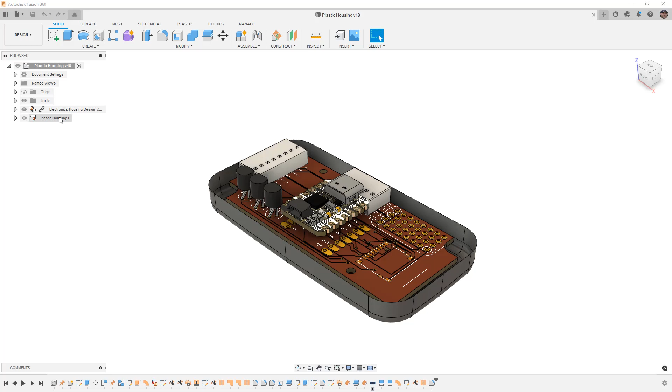But at the end of the last video, I left you with a question. I wanted to know what the difference was between using thicken on a drafted part versus creating a patch and using solid features such as the shell command.

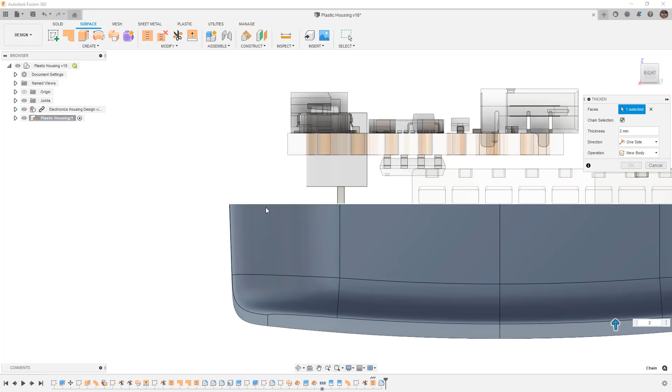The thing we need to think about when dealing with these parts is that the draft angle is going to affect everything. So when we use something like thicken, that creates a thickened surface in the normal direction to the curvature. This means that the upper face is no longer flat, it's going to be at 2 degrees. So these are the kinds of things we need to consider when turning surfaces into solid bodies, especially when accounting for draft.

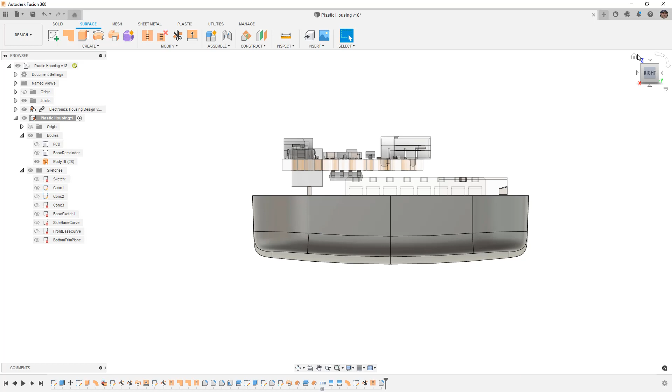For this example, I have to say, full disclosure, this is the third time filming this video. I want to avoid getting too deep into surfacing topics because that's not the point of this series. But as I kept recording and building out the top of the housing, the design got more complex and there were more issues with the surfacing tools in Fusion. So what I want to do is simplify it a little bit. We're going to do a hybrid approach, using some surface techniques, then adding more details once we get to the solid techniques. So the next step is to begin building the upper section of the housing.

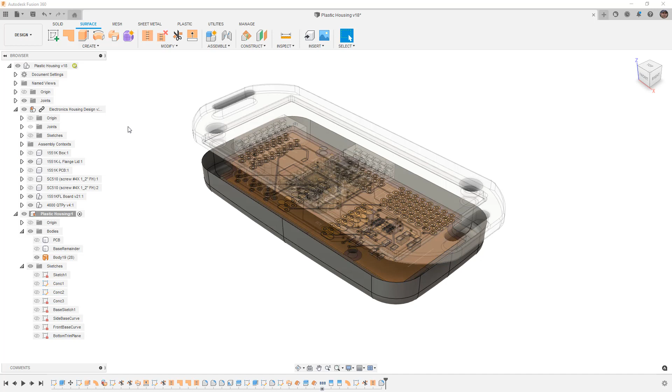Remember, the original design has little tabs or ears on the side, used to be held down to something using zip ties. I'm going to follow that same process. I want to use some way to hold this down with zip ties because it's intended to be on a motorcycle, and I'm not really going to bolt it down anywhere.

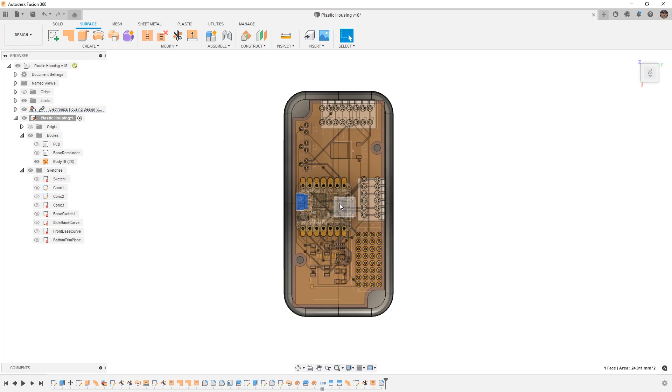However, when we look at this design from the top, we've got wires coming in from this side, potentially wires coming in here. We've got a USB-C and this Qwiic connector, and we have this reset. We might want to incorporate a small hole so we can stick a screwdriver down there. So when we consider all of that, we can't run a zip tie from the upper portion to the bottom portion lengthwise because it'll get in the way of the wires. We can't run it from left to right directly in the middle because then we cover up the Qwiic connector, the USB-C, and potentially the wires coming in here.

So the only options we really have are to split the difference. We're going to go from left to right, on either side of the microcontroller. This helps us because we're working with symmetry. We started this process by making sure we were in the center of our coordinate system, so it makes it a little easier for us. We also broke up the bottom face into quadrants, so really we can focus on just modeling a corner.

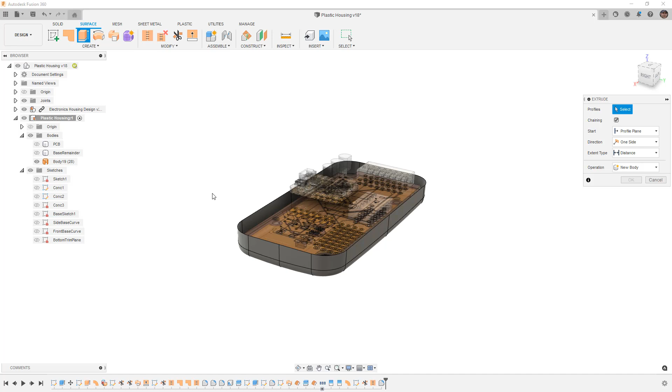So the next step for me is going to be to use Extrude. I'm going to select this entire rim, go to a right or back view, and bring this up. I want it to come up far enough that it goes completely over anything I want to encompass. So 9 millimeters looks like enough. I want to go a bit further because I'm going to add extra and trim it away.

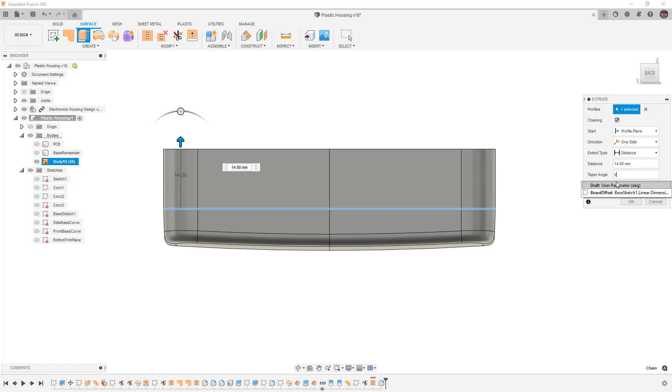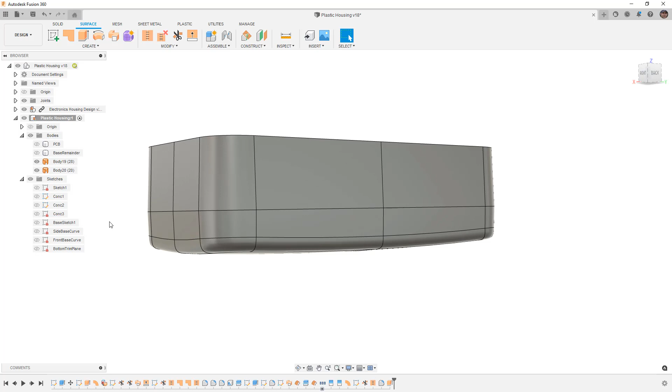Then we need to account for draft. If we simply enter D and use our draft parameter, notice that it drafts it outward. This is generally something we want to avoid because it will get stuck in a mold. We've already talked about the reasons why we need draft, so in this case we have to use a minus sign before to ensure it drafts in the opposite direction. This is a new body, so we're going to say OK. And now we've got the upper section here. I can hide the bottom, I don't really need to see it.

Just like we did on the bottom, we're going to create some arcs and create a swept surface. I'm going to start a new sketch, select my XZ plane, use slice, and then go to create, project include, and intersect.

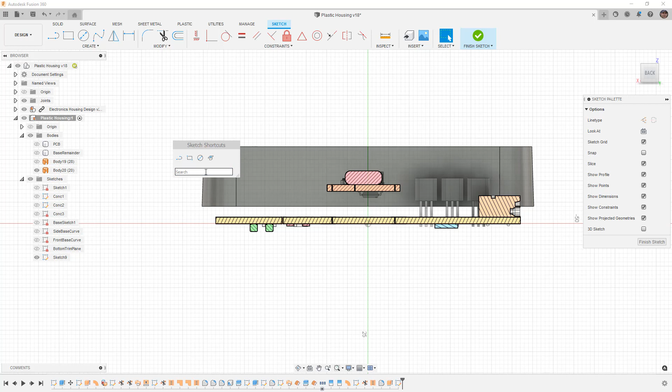If you're using these tools all the time, you can pin them to your toolbar, your shortcuts, or even create a keyboard shortcut. If you pin to the shortcuts and hit S on the keyboard, this brings up your sketch shortcuts. This is contextual, so if you're working in the design workspace on solids, not in a sketch, you'll see a different list of tools. Here we could either search for intersect by simply hitting I, and you'll get everything that starts with an I, or you can add it here so it's a little easier to get to.

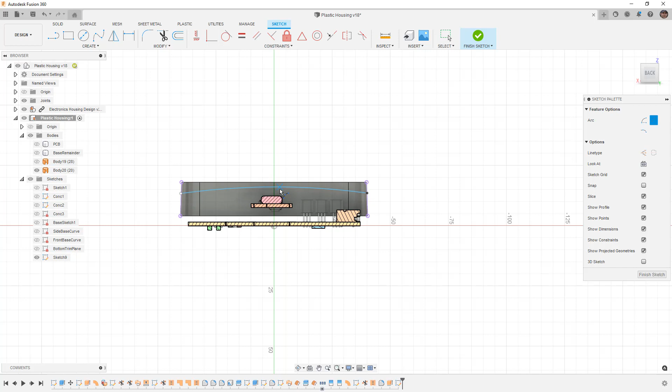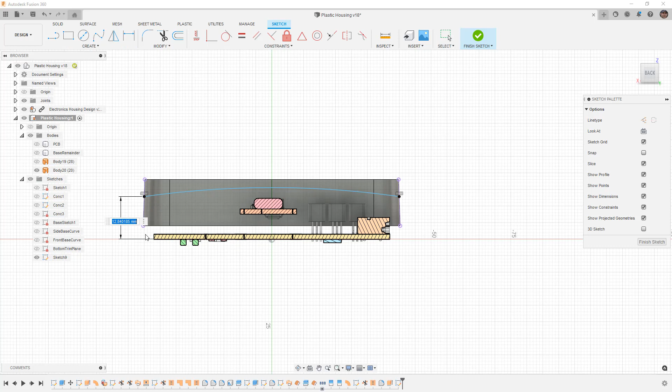I'm going to select those two on the side, say OK, and create an arc. Create, arc, 3-point arc, going from left to right to create an arc here. I'll use horizontal to create a horizontal constraint between these two sides. We want to make sure this is coincident with our intersection, then bring it down to a rough location where we think it makes sense. D on the keyboard or sketch dimension, we'll pick a position - in this case, looks like 12 millimeters, possibly 13 millimeters will be okay.

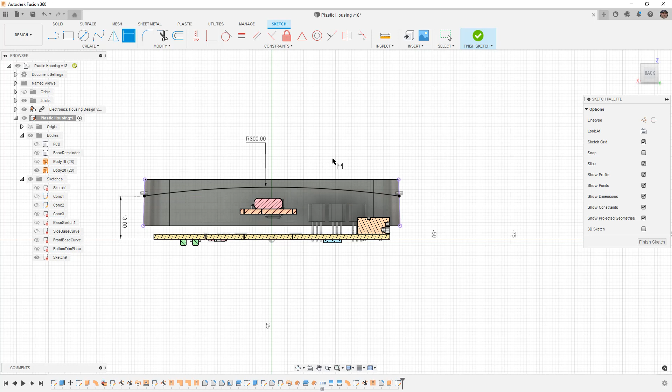Just in the interest of fully defining everything, I'm going to give this a 300 millimeter radius. Remember the one on the bottom was like 650, which means it's less of a curve - it's got a larger radius value, which means it's closer to flat. So we're going to have a little bit more curvature on the top, and that's okay. It's going to change the way this design looks.

We're going to repeat the process. This time we're going to use the YZ plane. Once again I like to slice, and we'll use intersect - I have it on my shortcuts now, so I can hit S, or you can go up to create, project, include, and intersect. We're going to make sure that we intersect with our arc as well as both sides here. I'm going to hit enter to OK that.

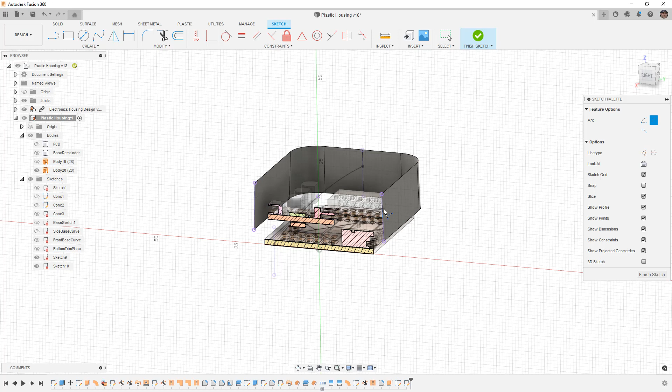Next, I'm going to create a 3-point arc. Once again we're going to go from the left to the right, making sure we snap, and then snap to this point here. You'll notice that this vertex is white, and that's because it didn't actually make a coincident constraint. So let's make sure we do add that, and then make sure these two are horizontal - it shouldn't over-define it, but just in case, we want to make sure they're horizontal.

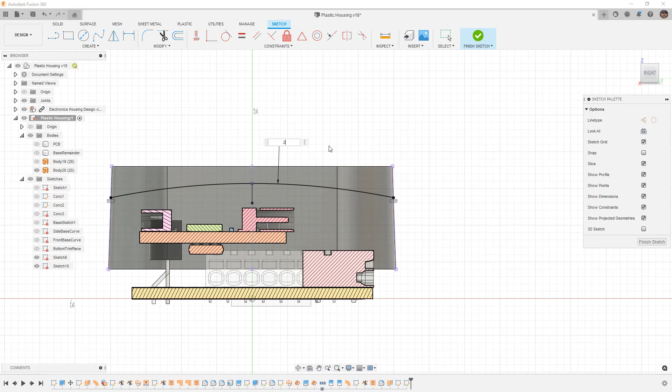Then I need to either give it a height from the origin or some other reference, or I can give it a radius value. So D on the keyboard, radius value - I'm going to say 200, a little bit less of an arc than it was coming in at, but you can see it's different than the one we've got going across the major surface. So we're going to say OK.

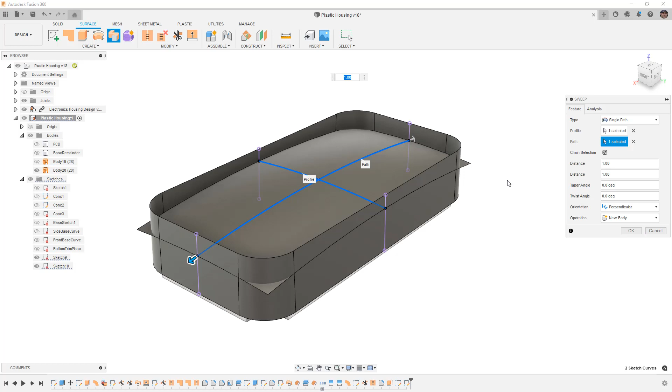Then we're going to use sweep, pick one of these as our sweep profile. We're using a single path, and we're going to create that surface. Note that we could extend this out - we could have created these curves to go a bit farther, but in the interest of symmetry, using those intersections really helps us. So now we have two surfaces here.

In an ideal world, we should be able to stitch them together and just fillet the corner. It's the same thing we did on the bottom, but sometimes it's not going to work. So let's try that method first, and if it doesn't work, then we'll come back and use some surfacing techniques. So again, I'm going to trim.

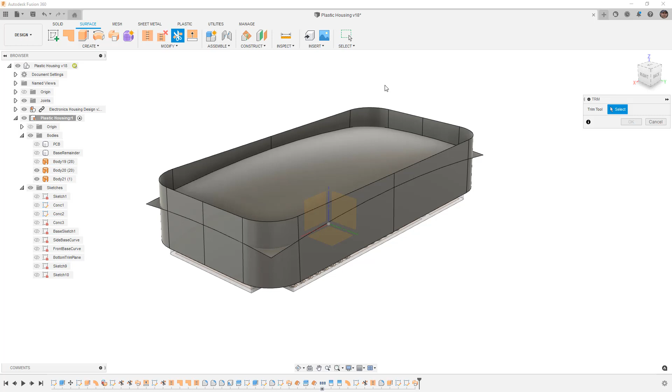I'm going to use this as my trim tool, get rid of this upper section here, right click and repeat that. This is my trim tool, and then I need to get rid of each of these little corners. You probably want to rotate this around because it does tend to have trouble when your selection is obscured by your trim tool. We're going to say OK.

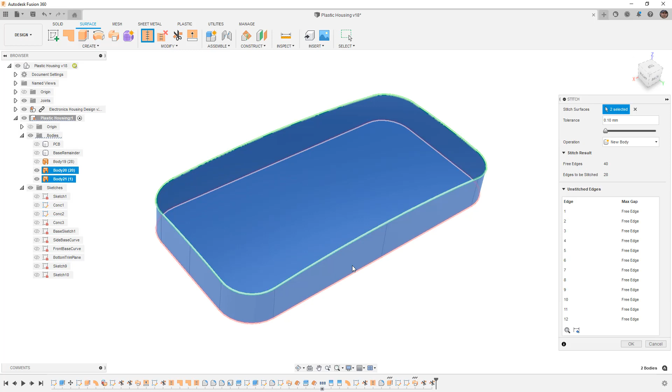And now we're going to try to stitch these two together. What we should see is an entire green edge where they're going together. Now, once again, in an ideal world, we'll be able to fillet this.

We're going to select this edge. I'm going to put 2 millimeters to start, and notice that it's giving me an issue. It doesn't like this. If I try to go down to 1 millimeter, you can see it's not working here either. So sometimes this tends to happen.

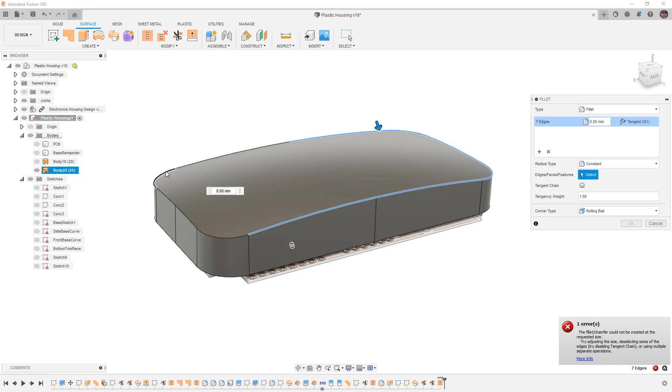Now, unfortunately, I don't know what is going to make or break it, but I'm going to manually go around and I'm going to try to select. Now, what ends up happening if we skip a selection, you can see that we can just go back, and what we're trying to do is create this entire chain.

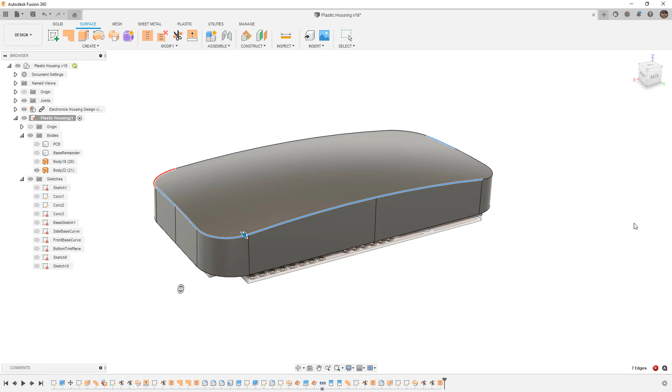If I hit 1, notice that it's giving me an issue. It's saying that this edge right here is not working. If I deselect it, you can see that it's just telling me that the fillet's not working on some of these areas. So this is obviously problematic, and it's not going to be a good solution for us. It's going to take a lot of work to figure out why that fillet's not working.

So I'm going to go back before the stitch. I'm going to get rid of these trims, just delete them. And now I'm going to create offsets.

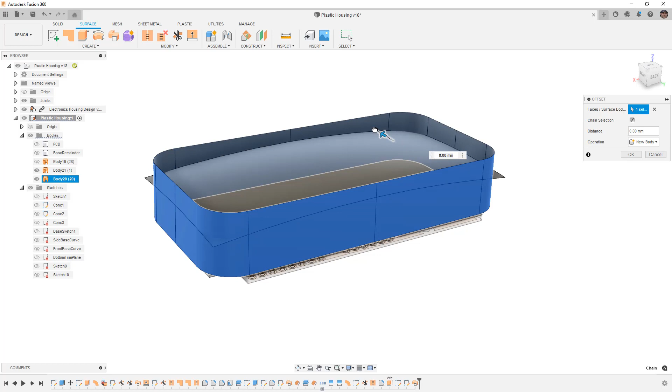So while this is not an ideal method, it does give us a little bit more control. And what I'm going to do is create an offset of this surface, and I need to go in the value that I want for my fillet radius or my blend. So you can see here that if I offset this and say -2, we want to go inward.

This is going to go in 2, and we're going to use this to trim our upper surface. So we need to think about and plan out how far in we want that blend. For this example, I'm going to make it a bit more extreme. I'm going to go in 4, and then I'm going to repeat that offset.

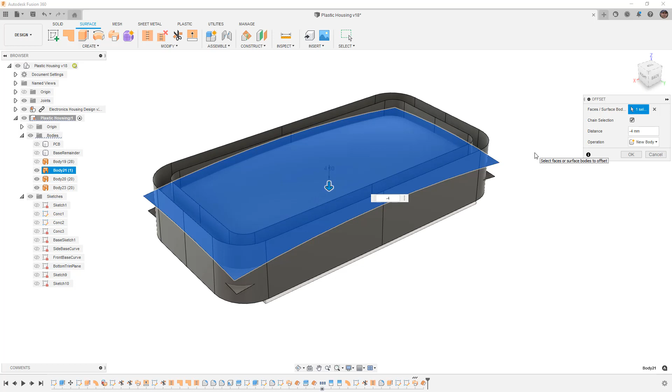And I'm going to do it this time with this edge. I'm going to go -4, which is going to push us down. And then because this no longer intersects the entire edge, we can either use it as a split tool, and that split tool we can allow to extend out, or we can extend it manually and then trim.

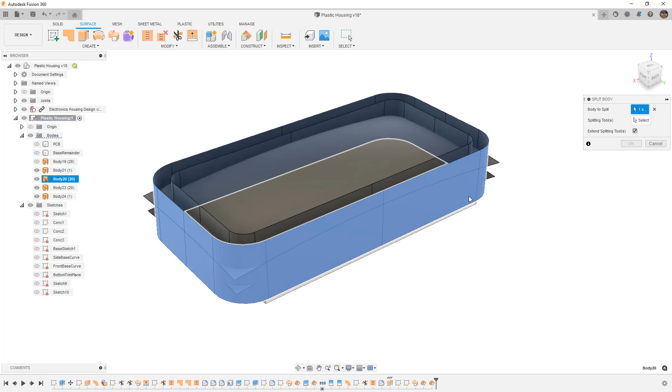First, let's go ahead and try to use it as a split face or split body. So let's try split body first. Bodies to split will be this outside. The splitting tool will be this surface. We're going to allow it to extend, and we're going to say OK.

Now if we take a look in our browser, this upper section here is no longer needed. It was able to split it even though that surface didn't actually touch it. Next, we want to do the same thing, splitting this upper surface that we want to keep with this.

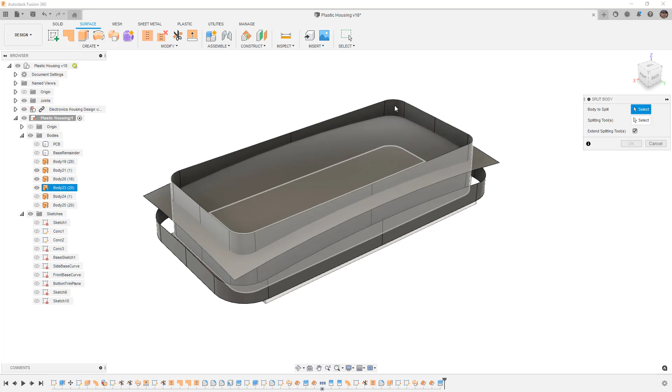Now, again, we can use trim or split body. Either are going to be fine. For some reason, I find that split body tends to work a little bit better when you have surfaces that you need to extend. It saves you time of making extra features in your timeline.

So we want to split this upper face. Our splitting tool is going to be this, and we're going to say OK. We don't have to extend it in this case.

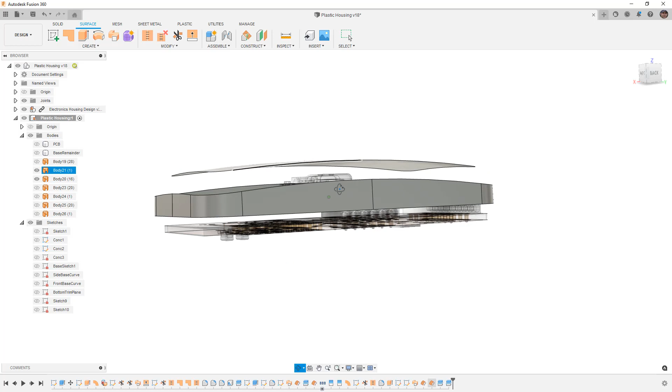Just note that now we don't need this one. And this outside edge, we don't need that either. So what we're left with here is the upper surface and the border. And because we offset them, we have a really consistent distance between each edge.

So all the ones that we aren't using, I'm going to select, right click and remove. Remember, remove is going to put those features in my timeline.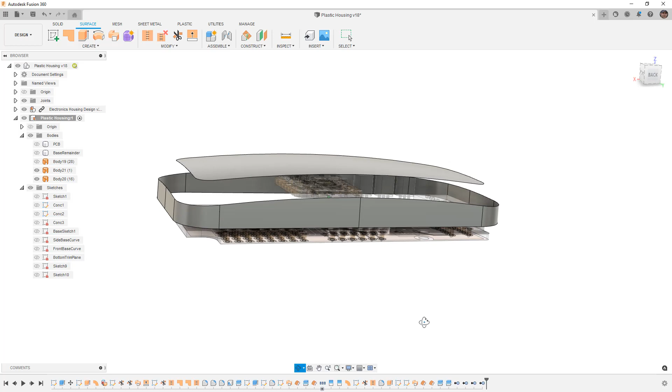I can go back and bring them back at any point in time by simply deleting or suppressing those. The next thing we need to consider is the fact that we're working with symmetry. When we're working with symmetry, we really only need to focus on one corner of this.

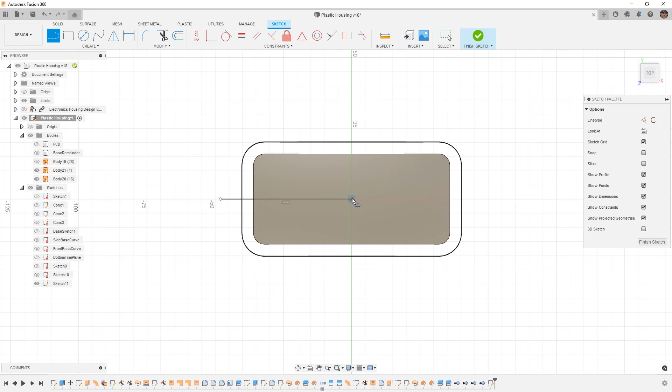For right now, I'm going to hide the electronics housing and create a new sketch on the top plane. The reason I want to do this is because now I can use my line tool and just draw the corner that I want. This is helpful because I don't have to do two trims or two splits with planes, and now I can simply use this sketch.

So we can use the trim or the split body. The trim tool is going to use our sketch, but we want to make sure we hold down Control or Command and select both of those, then remove everything outside of it. We need to hide that sketch, and you can see now we're just left with this corner.

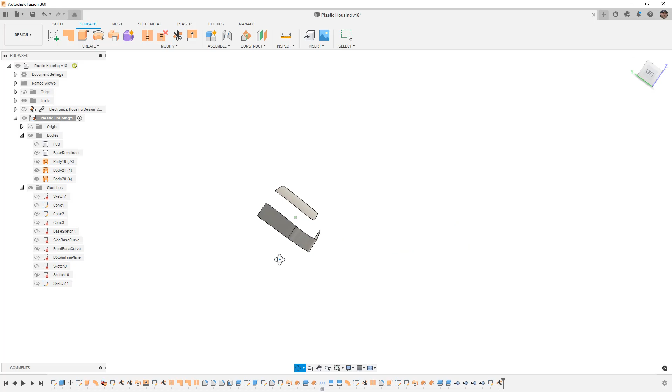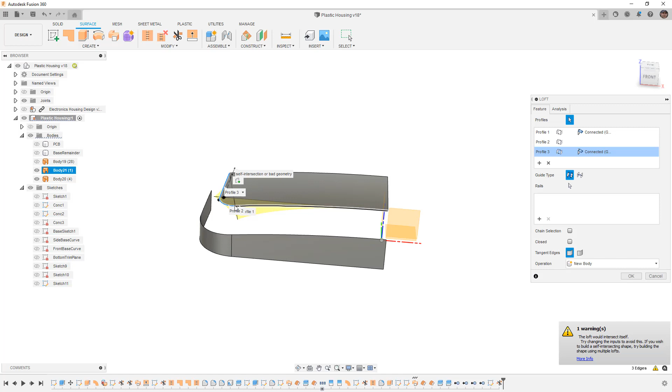The way this would work ideally is if we were to either create some guides on the sides and use the patch tool, or we can simply loft between them. I'm going to try the loft approach using this upper edge. You'll notice as soon as I went across these corners it started to add additional profiles, and that tells me there's a small gap between those edges, which makes it problematic to figure out the tangency along that curve.

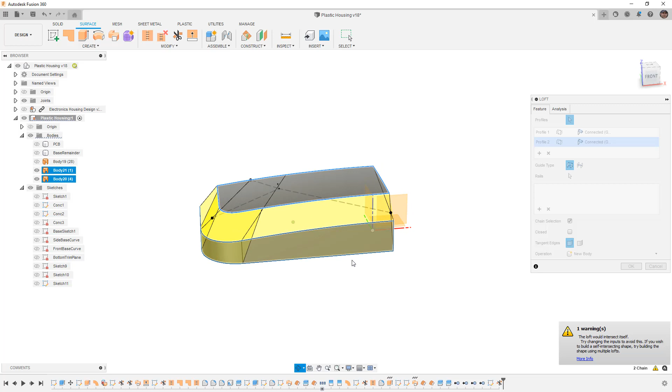So one thing we can do is turn on chain selection. If we use chain selection, it's going to go around the entire thing, and this becomes problematic when we get to the bottom because it's trying to combine the whole thing. Because of that, I'm going to clear both of these out, and I'm just going to go from one edge to the other, allowing it to drive based on curvature.

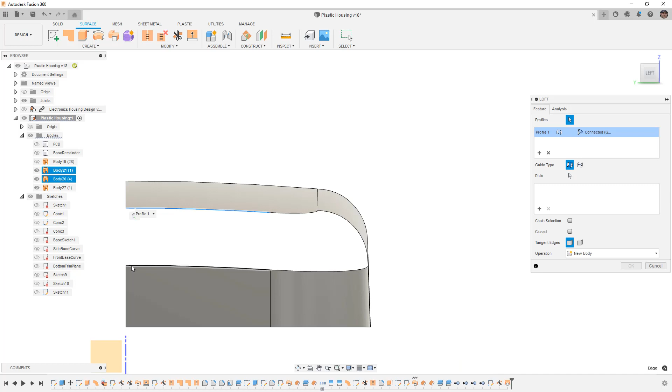Using that curvature continuity is going to allow us to take the shape at the top and blend it across and down to the bottom. I'm going to right click and repeat that, this time going from here to here, and once again use that same curvature continuity.

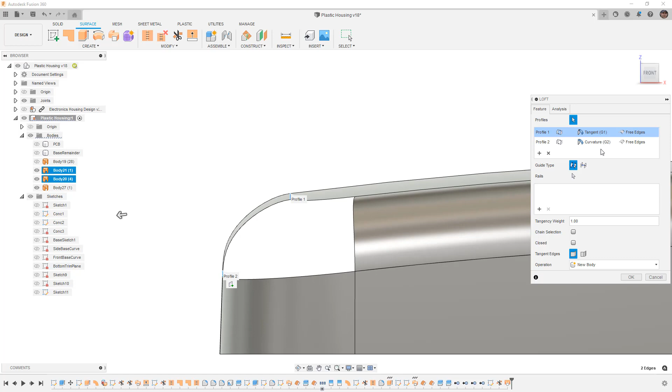When we think about tangency versus curvature, really what we're talking about is handling the direction of influence, or also taking into account the radius at that intersection, which helps us get a smoother transition. For example, profile 1, if we change it to tangent, you can see it's really only controlling the direction. We have a tangency weight which we can change if we want, but we also have that for curvature. When we change to curvature continuity, it's looking at the radius of curvature here, and it gives us a little bit better blend.

Again, this isn't intended to be a surfacing course, but that does give us a different appearance, so I think it's important we understand it.

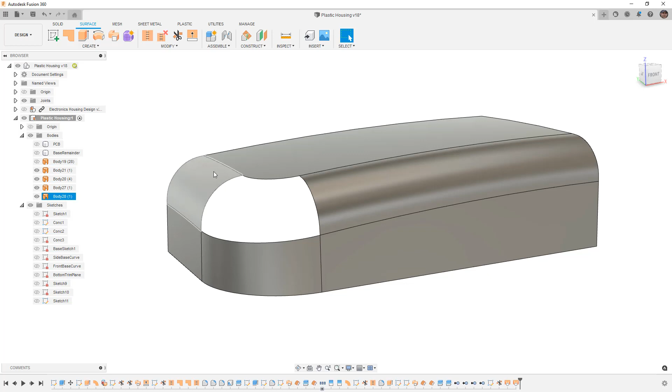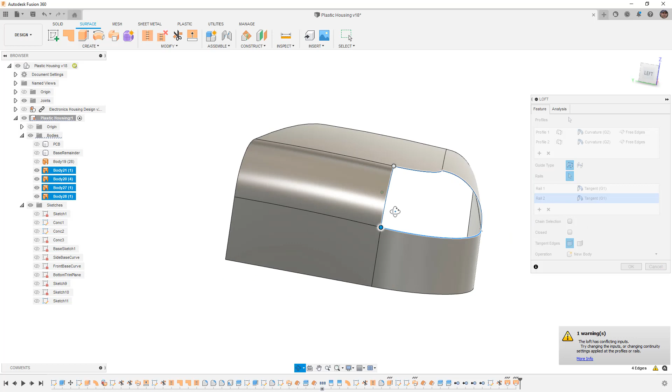Next, I'm going to try to create a loft to fill in this corner. You could also use patch, but for some reason in this geometry, patch isn't working well. So I'm going to grab these edges, top and bottom, and say curvature continuity. For the two sides, I'm going to try tangency first, but I found it's actually been problematic for these corners - I don't know why, but it doesn't seem to like this. So I'm going to leave these at connected, and say OK, allowing the curvature continuity of the top and side to control it.

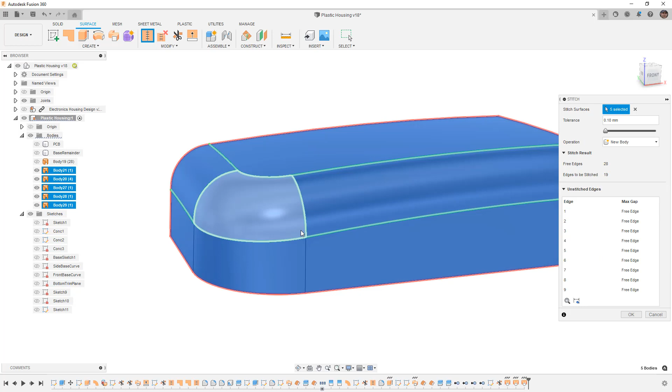That actually looks pretty good, that's going to be OK for us. Again, I can't stress enough, this is not a full best practices surfaces course - we're just looking to create this geometry. So while it might be less than ideal because we really didn't have full control in this corner, I think that everything looks pretty good.

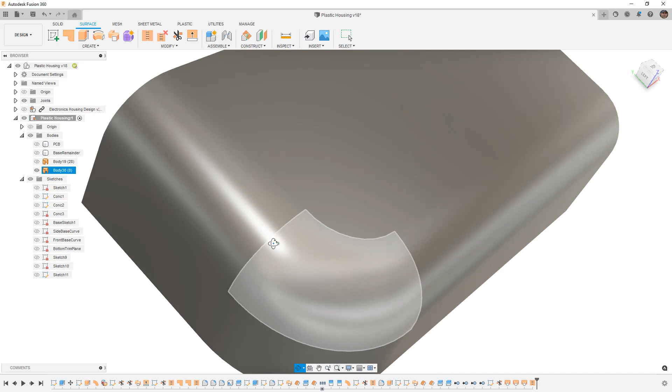I'm looking at the reflections going across. You can use Control or Command and 4 to zoom in, and you'll notice there's a slight line that happens here.

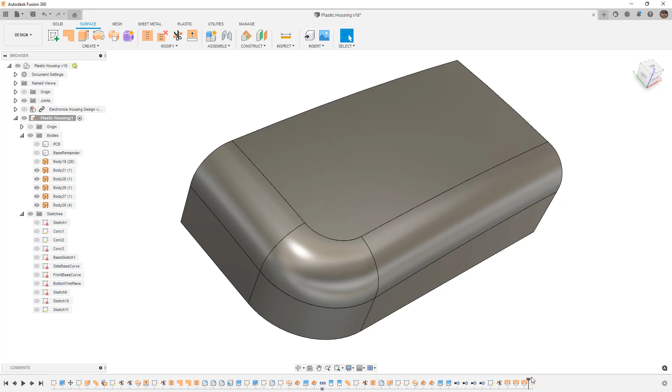That's not ideal because we didn't control curvature across those edges. So if we wanted to spend more time, instead of stitching these together, we could trim back a little bit and work in those corners. Some other options we have before doing offsets, splits and trims: we could try to turn this into a solid body, which is sometimes a bit more robust. But for this example, let's try to push forward and see if we can get a good solution.

Next, I'm going to go to mirror. I want to mirror this entire body instead of faces, so select bodies, and then the mirror plane. We're going to go across that midplane. We could join them together here, but I'm going to leave that to another step.

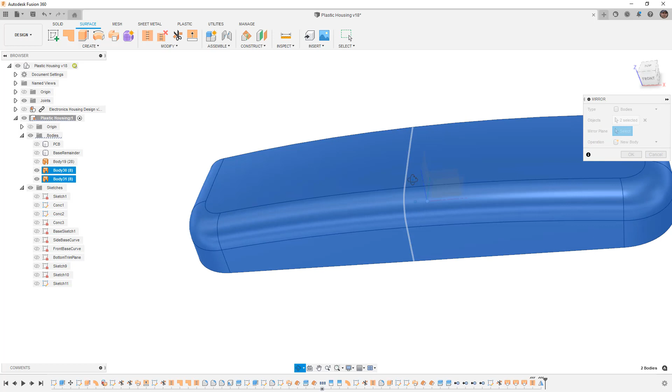I'm going to repeat the mirror, both bodies here. The mirror plane is going to be our XZ plane, and again we're going to use new body, because we're actually going to stitch all of them together. So I'm going to select the bottom and then the 4 quadrants on top.

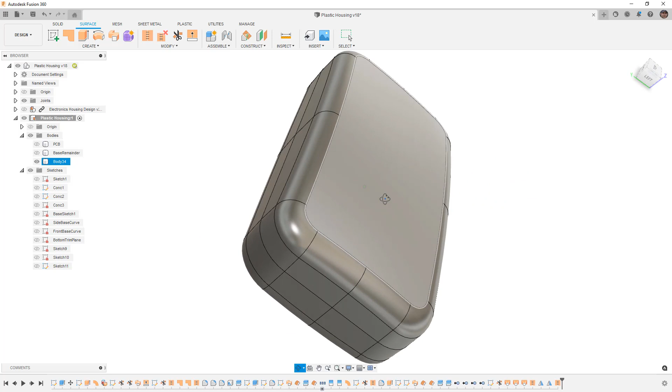When I do that, you'll notice this top face doesn't have any divisions on it. It was able to patch it back to that original clean surface, which is pretty helpful for us. And now we have a solid body.

At this stage, there are a couple things we could do. We can split this up into a top and bottom and continue to work with it, or we can go forward and make those recesses that we need for our design. So let's do a quick save just in case we lose anything.

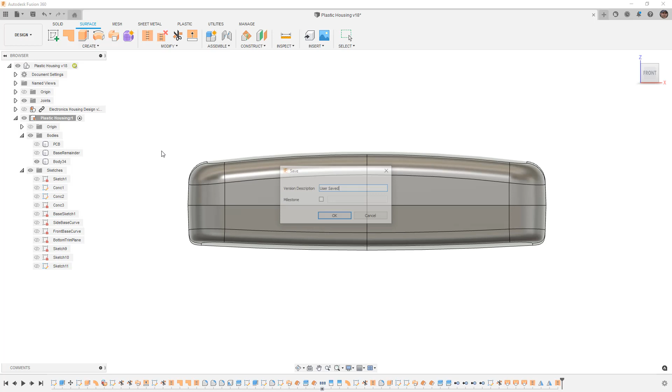I'm going to bring back my electronics design. I'm going to create a new sketch, making sure it's on the XZ plane, and now I'm going to slice through. You can see we've got solids here - these are all the things we need to be aware of.

Remember that we have those transistors, and those are going to be driving our height a little bit. But in reality, I was actually able to push them down pretty close to the board, so this USB connector is likely the highest thing we need to worry about.

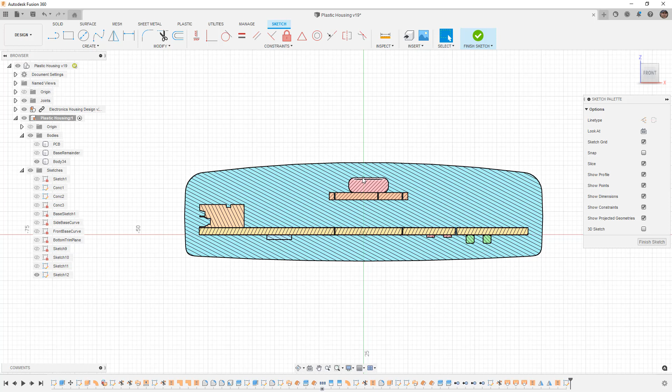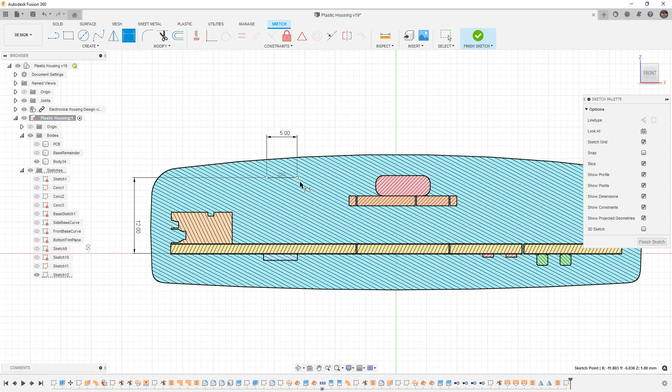So I'm going to create a line where I want my zip tie to rest, drawing a horizontal line. I'm going to use D on the keyboard to add a dimension, making sure it's at least 5 millimeters wide - not really a big concern here. Then I want to give it a dimension to position its height, let's say 12 millimeters, and position it horizontally. I just want to fully define its location - I'll say 15.

The next thing I want to do is create a cut, and we need to decide: are we going to do fillets on the sharp corners, or try some surfacing tools to blend it together? Now, I mentioned this is the 3rd time I'm filming this, and I found Fusion was having some difficulty when I was trying to make those smooth spline transitions and blends.

So for this example, what I'm actually going to do is take lines up at an angle and create this cut. This top edge is parallel with the bottom - doesn't really matter, but I want to control these angles coming away. I'm going to use D on the keyboard and set this at 135 degrees. On this other one, because we're tapering away, since this face is dropping down, I could use the same angle or make it larger - it's really not going to matter, more of an aesthetic decision at this point.

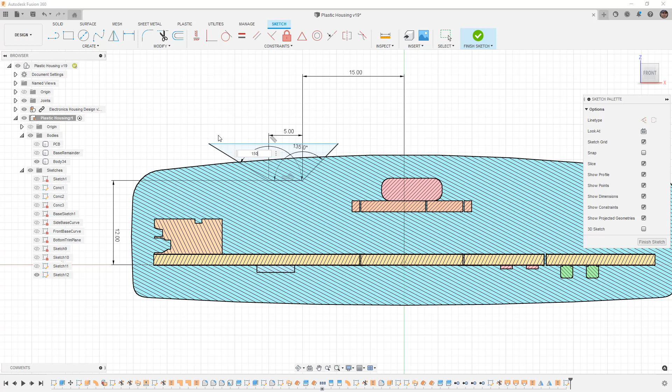Once we have that, we can simply go to our solid tools and extrude cut it through the housing. I'm going to set this to symmetric, and we can set it through all. We want to make sure the objects we're cutting are only the solid body for the housing.

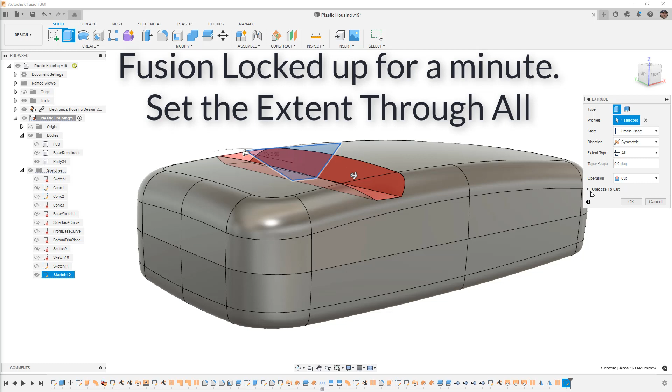Now that we've cut all the way through, let's make sure that our objects to cut is just the plastic housing, and we're going to say OK.

Next, we're going to try to add some fillets here. I'm going to use my fillet tool and begin adding fillets, remembering that if we're going to create a shell or a thicken, we need to account for the radius value. 2 millimeters is going to be the thickness of our housing, so I want to make sure this is at least larger than that. I'm going to say 3, OK, and then repeat that and do it on the outside.

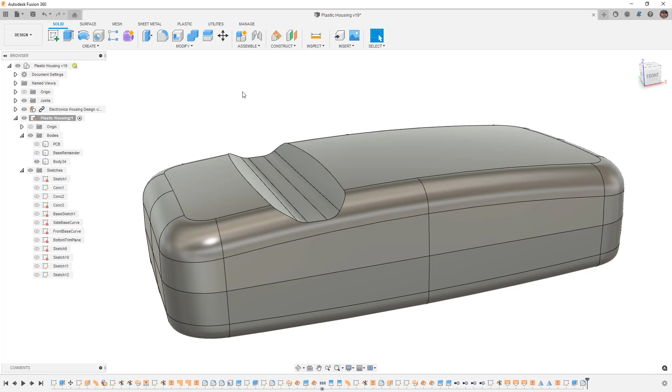Note that we could add additional fillets inside the fillet dialog box, but sometimes it's better to come out and do them after the fact. So here I'm going to say OK.

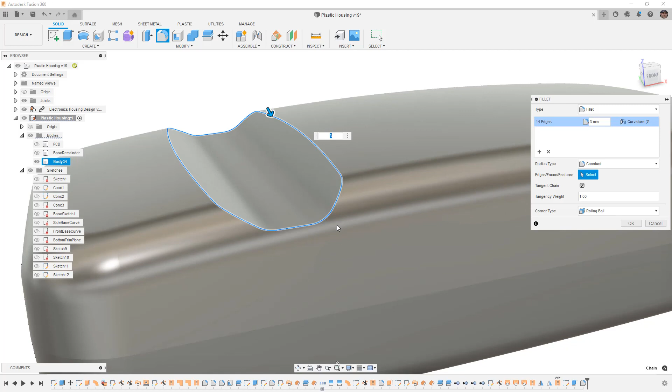Remember that we can use things like curvature continuity, and when we're crossing over a blend like this, curvature continuity is probably going to be a better option. But you can see here that it is causing some issues in those corners. If I set this back to tangency, you can see that it actually looks a bit better. So these are the kinds of things that we want to be mindful of and investigate while we're creating this geometry. That looks pretty good.

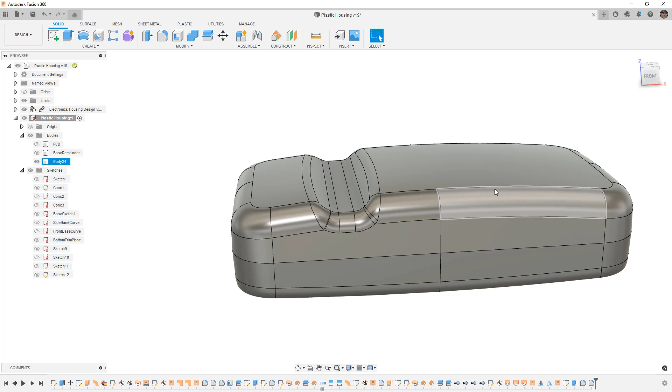Now we have to figure out how to get it to the other side. Because we are working in symmetry, we can split this body up in half. So this is the body to split, and the splitting tool is going to be our mid plane. I'm going to hold down the left mouse button until I find that YZ plane. You can see that it splits it right there.

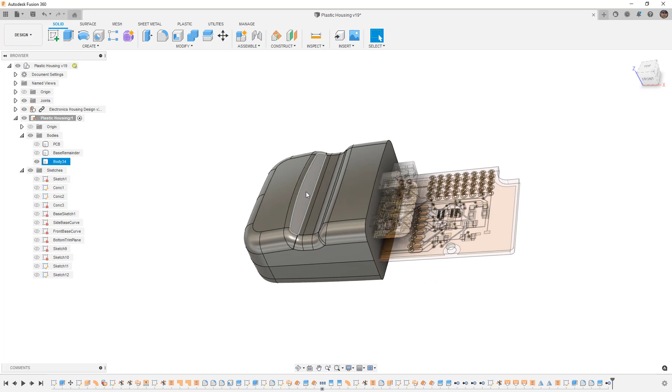It's going to give us an additional body. This body we don't need, so I'm going to remove it. And then I'm just going to mirror this entire body. So create, mirror, make sure we're mirroring bodies, not components. The mirror plane can be that inside face, and we can join it together. We need to be careful when we join it together to ensure that we're not accidentally grabbing additional bodies. Everything else was hidden, so it won't automatically do that, but just note that we do need to be careful.

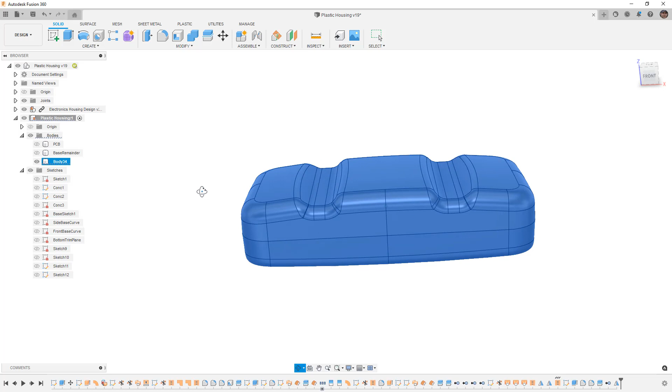So now we've got the solid portion of our housing. You can see here, if I use Control and 4, I can hide the edges. We've got the little areas for the zip ties to go through. We have a pretty smooth result.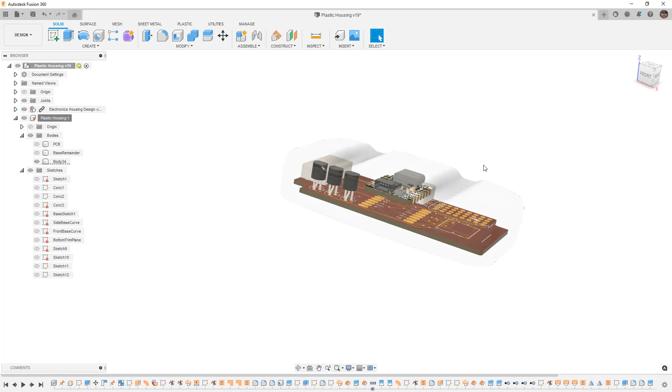If I go back to the top level of my design and right click on my plastic housing and change the opacity to something like 20%, you can see here that we can rotate around, we can investigate where our geometry is, and now we can make openings for things like this quick connector. We can make a drop, a cut, or a recess for the USB. These are all things we want to make sure we incorporate in the solid version right now before we really get carried away and start shelling it and trying to add internal features.

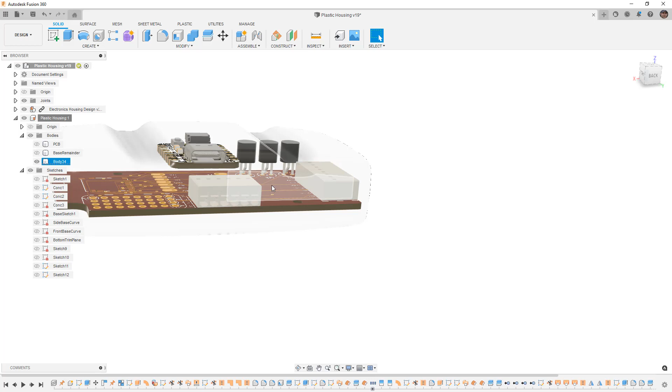So I'm going to reset the opacity, go back to opacity control, set it to 100. Go back to home view, Control and 6 to bring those edges back, or visual style, shaded with visible edges. And now we can see the design. I think at this point it actually looks pretty good.

We need to do some work to split it apart, but we want to make sure that we account for at least that USB-C connector before we do. But at this part, let's go ahead and make sure that we save it, so we don't lose any of our work.